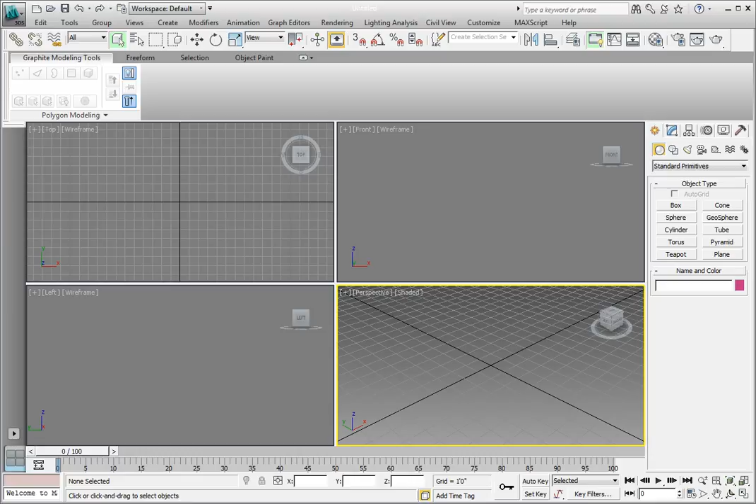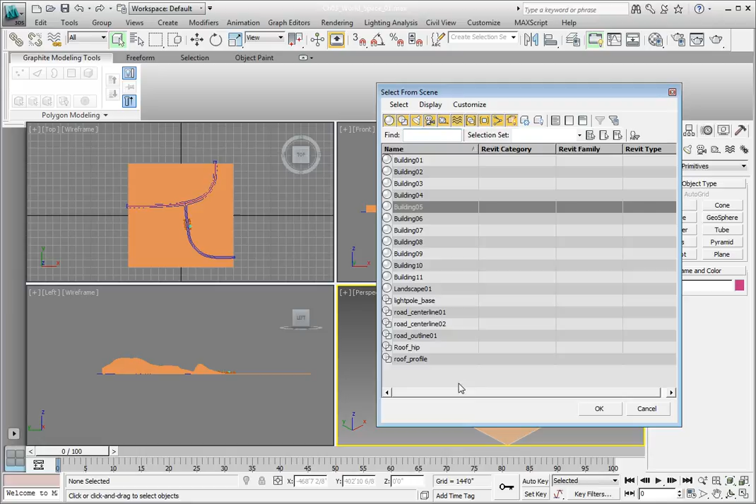From the main toolbar, click on the Select by Name tool. In the Select From Scene dialog, choose the object called Roof Hip and click OK. In the navigation toolbar, click the Zoom Extents All Selected option.

Now we're going to apply a material, a roof shingle material, to this roof. We're going to learn a little bit about materials here, but don't worry about getting into any detail right now. Let's open the material editor.

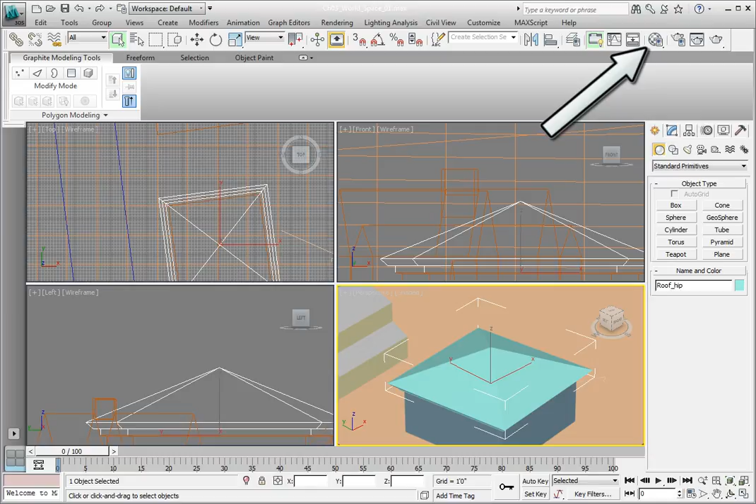We want to open what is now called the Compact Material Editor. In the main toolbar, click and hold the Material Editor button. In the flyout, choose the Compact Material Editor option. That will open the Compact Material Editor.

Here we have a sample window with shingles as our first material. Click the sample window and drag and drop it on top of the roof hip object in the perspective viewport. The roof should turn gray, and the material sample will now have white triangles in each corner.

To see the texture that will be applied to the roof in the viewport, click the button called Show Shaded Material in Viewport. This will show the pattern that's in the material on the roof in the viewport. Now the pattern that we see doesn't look anything like roof shingles.

We want to apply roof shingles perpendicular to each of the roof surfaces, no matter which angle its surface faces. This can normally be a relatively difficult task, but we'll use the Map Scaler World Space modifier to accomplish this task quite effectively. In the Modify panel, click to open the modifier list.

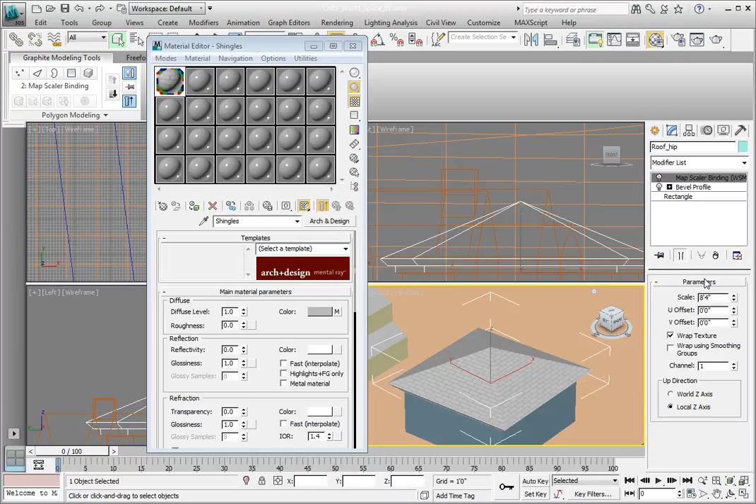Here in the World Space Modifier section, choose Map Scaler. You'll notice now that the shingles all map correctly to each section of the roof. Now we need to resize it correctly.

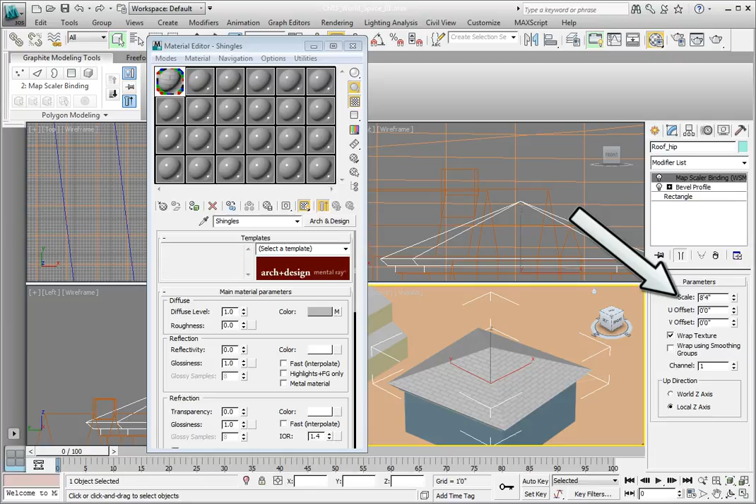Now, this is not something that you would be aware of at the moment. The pattern that is making up the shingles fits within a 2 foot by 2 foot area. In order to correctly scale the roof shingles, we need to enter 2 feet in the scale parameter of the Map Scaler World Space modifier.

In the Scale type in 2 feet and then press Enter.

Now, in order to see the results, you'll have to zoom in. Go ahead and zoom in close to this front corner, and you'll see that the roof shingles are all now the correct size for this particular map pattern.

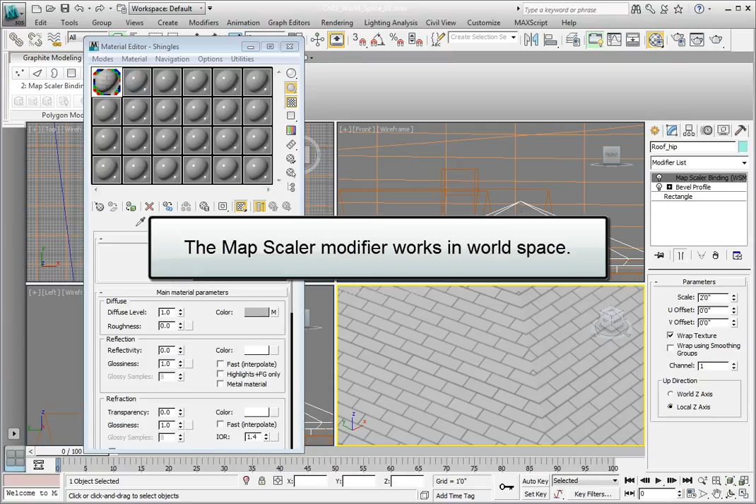Again, right now, don't be too concerned with what the material itself is doing. Just be aware that the Map Scaler modifier is working in world space, so it ignores the local geometry and allows the texture pattern to be projected onto each face, no matter which direction the face is pointing.

Save the file by pressing Ctrl+S on the keyboard.